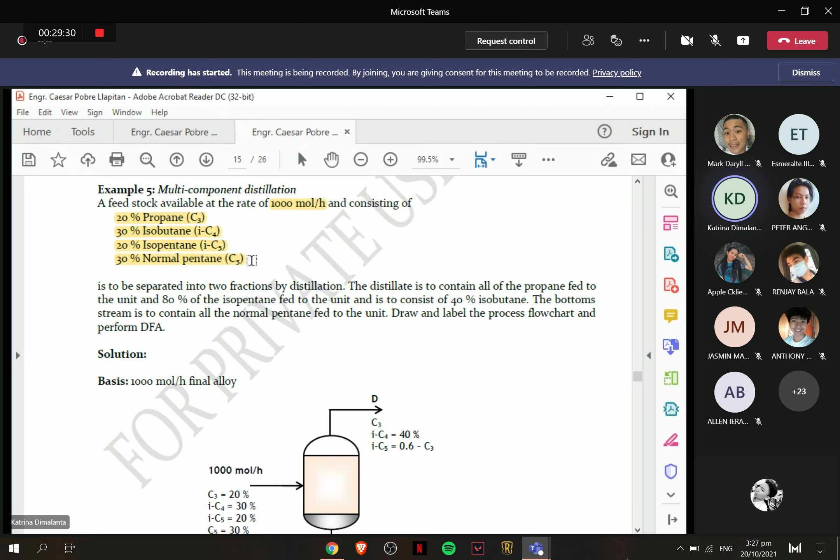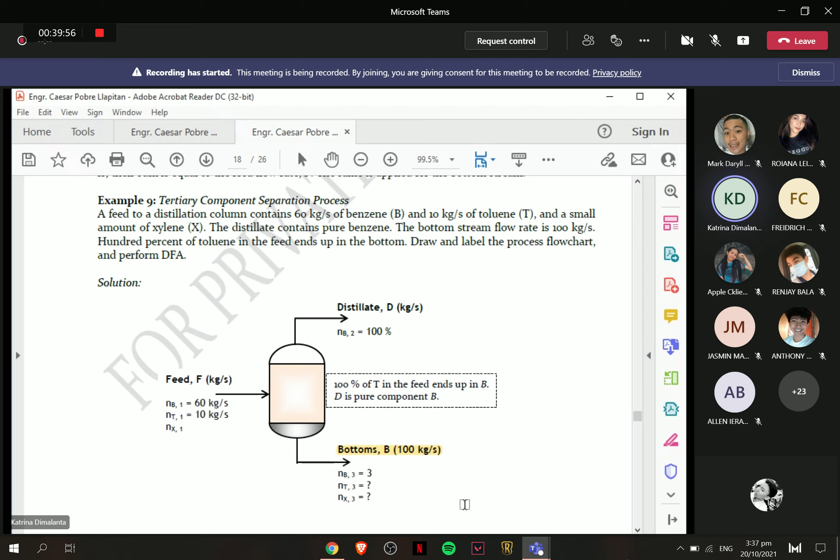Yung bottom stream mo is meron kang given na flow rate, pero hindi given sa'yo yung mga ito. So sabi, draw and label the process flow chart and then you're gonna perform the DFA. So, number of unknowns. So ito ang ginamit natin dito is yung alternative formula kanina. Yung sinabi na yung NDF or number of degrees of freedom is equal to the number of unknowns minus the number of your independent equations. So kung nalilito kayo dun sa unang formula ng degrees of freedom, I suggest na gawin ninyo yung pangalawa kasi personally, I use that more. It's easier to remember din kasi.

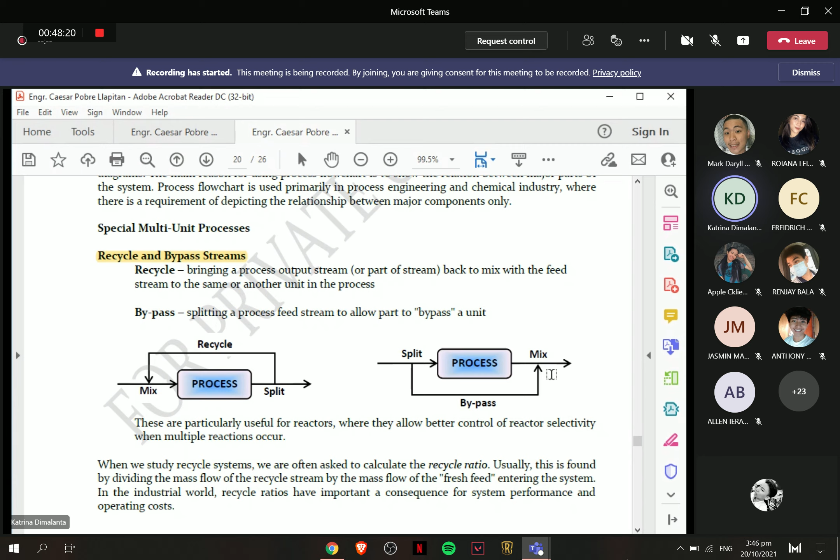So depende nga yan sa pangangailangan mo. Hindi lahat ng processes kailangan mo ng recycle. Again, hindi lahat ng processes kailangan mo ng bypass. Pero it's important na alam natin na meron tayong options na ganito for our process reactions. Okay?

Meron tayong tinatawag na reactor separator structure. So meron kang reactor, tapos yung iyong product after the reactor ay isa-separate mo. Ang sineseparate mo, yung mga nasa taas, yung babalik dito sa fresh feed mo, yung nire-recycle mo, yun ay unreacted na reactants. Tapos itong product mo, kumbaga, mas concentrated lang siya na product from your reactor. So nagigets pa naman yun, no? Para lang hindi masayang yung reactant mo. Kasi, again, we will always try to find ways na maging optimal yung ating process kung saan, kumbaga, nabibigay natin yung best quality of the product at the lowest cost. So yun yung gagawin natin.

Ang note lang dito, itong separator, pwede daw yan na isang process lang, pwede naman na yung separator mo actually is divided into several processes. What if yung separator mo pala is distillation column plus may crystallizer ka pa, something like that. So that's possible. At yung sa bypass naman, gaya nung sinabi ko kanina, it's used to obtain a precise control of the output stream. So if you want to vary your output concentration, pwede na maglagay ka ng bypass stream dyan. Okay?

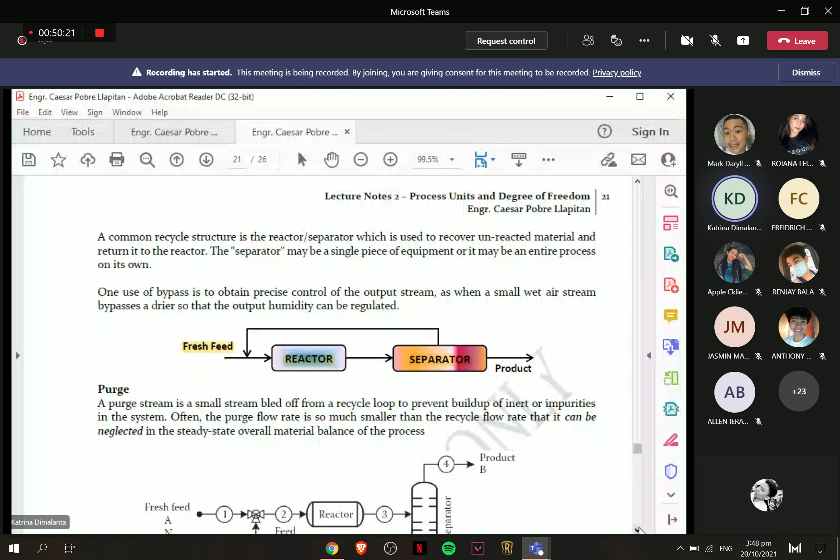So kapag sa vapor naman, pwede mo makontrol yung humidity, so in a way, concentration pa din yan ng inyong product stream. Tapos ito naman, meron tayong tinatawag na purge. Kasi ito recycle stream ito, so this is pretty similar dun sa example na binigay sa inyo last time, pero wala nga lang purge yun. Itong purge, ang ginagawa, take note, yung direction ng arrow nyo is palabas. Ang ginagawa mo dyan, binabawasan mo lang yung recycle stream mo. Kasi ang nangyayari kung minsan, yung fresh feed mo, pwede na meron kang inert substances dyan, kunwari, mga hindi talaga nagre-react na part dun sa reaction. For example, pag sa combustion, remember sa chemistry, yung nitrogen ninyo, hindi yan nagpa-participate sa combustion.

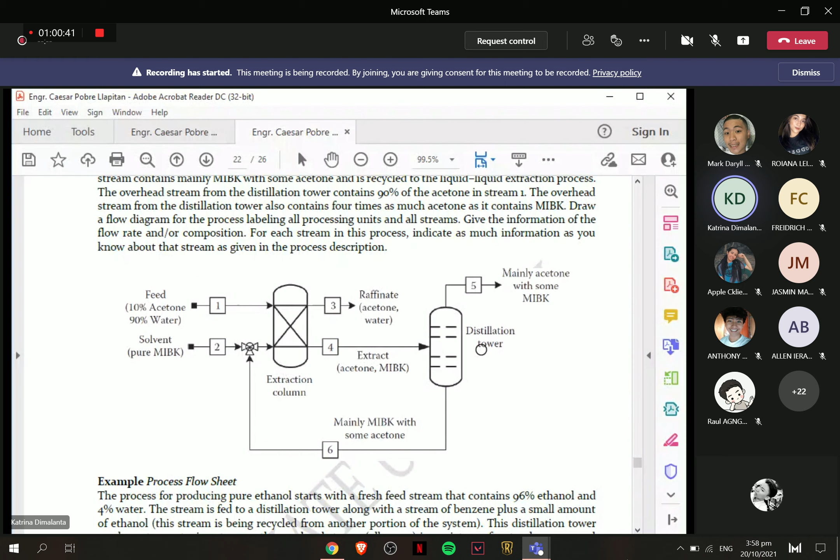So it says, draw the process flow sheet again. Then, this one is quite long. My gosh. You have a process for producing pure ethanol. So the first one there, you have a fresh feed stream. Then, it is 96% ethanol. So basically, what we want, our product, is pure ethanol, okay? And if that's 96% ethanol, the rest is water.

It's being fed to a distillation tower. Then, in your distillation tower, there's also a stream of benzene plus a small amount of ethanol. This stream is a recycle from another portion of the system. Your distillation tower has two outgoing streams. The overhead is purely vapor and made up of water, benzene, and ethanol.

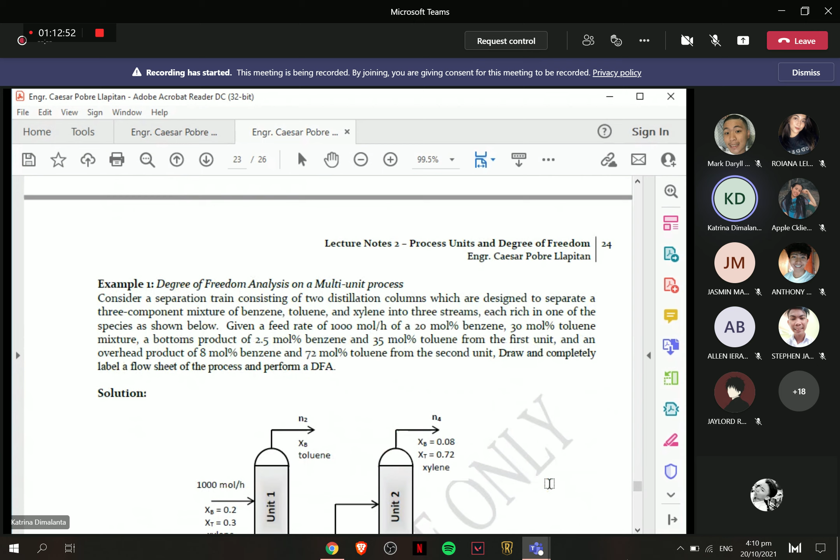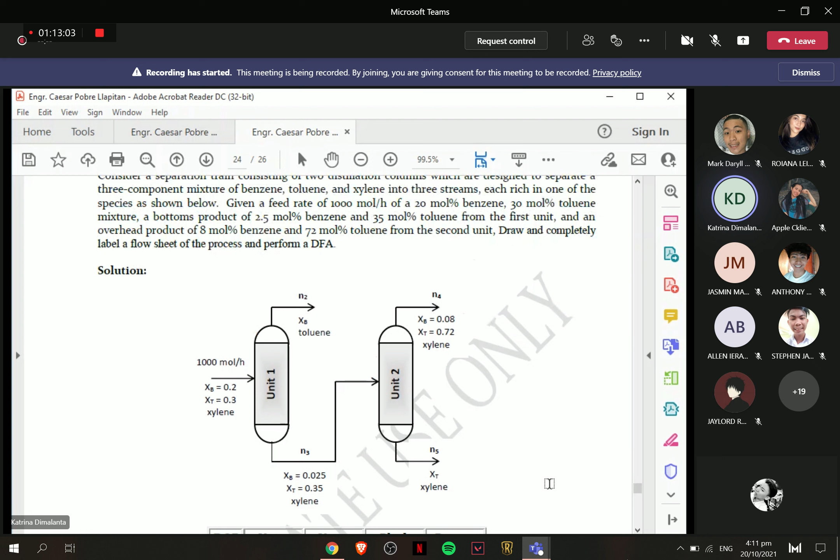So, ang sabi dyan, consider a separation train consisting of 2 distillation columns which are designed to separate a 3-component mixture of benzene, toluene, and xylene into 3 streams, each rich in one of the species as shown below.

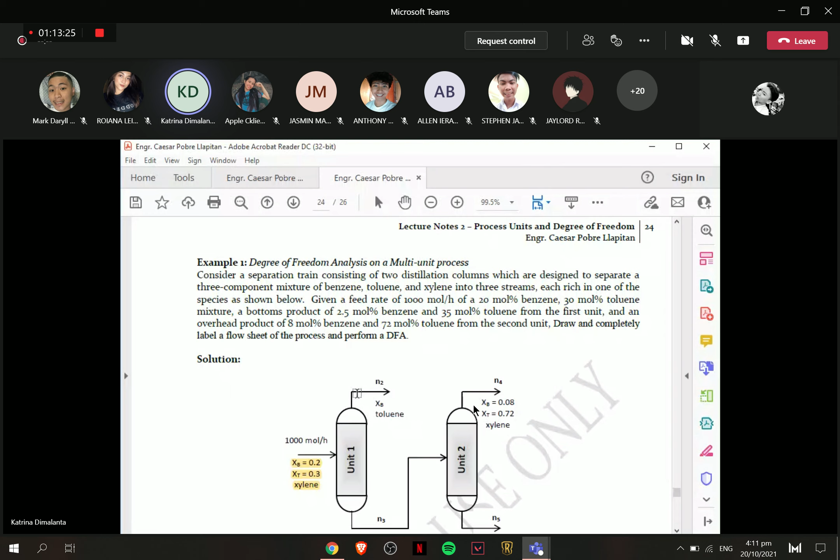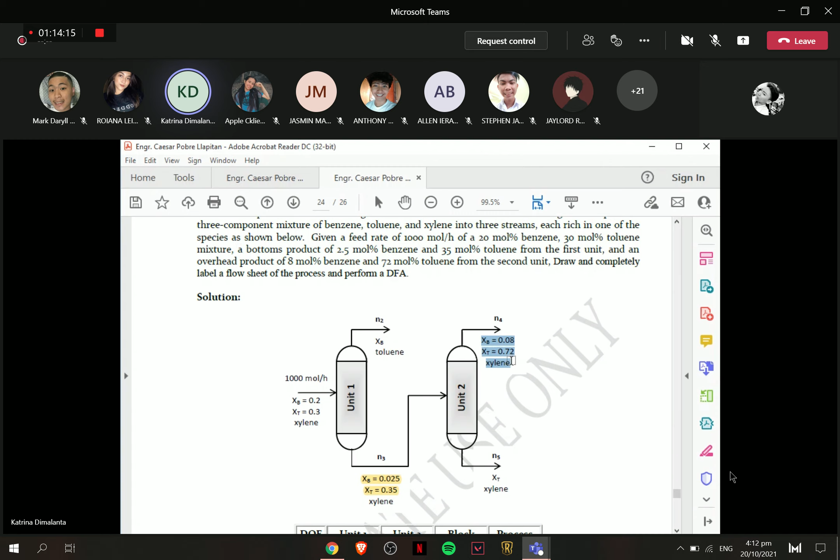So, given a feed rate of 1,000 moles per hour of a 20 mole percent benzene, 30 mole percent toluene mixture, and a bottoms product of 2.5 mole percent benzene and 35 mole percent toluene from the first unit, and then an overhead product of 8 mole percent benzene and 72 mole percent toluene from the second unit. So ito yung given niya. Draw and completely label a flow sheet of the process and perform a DFA.

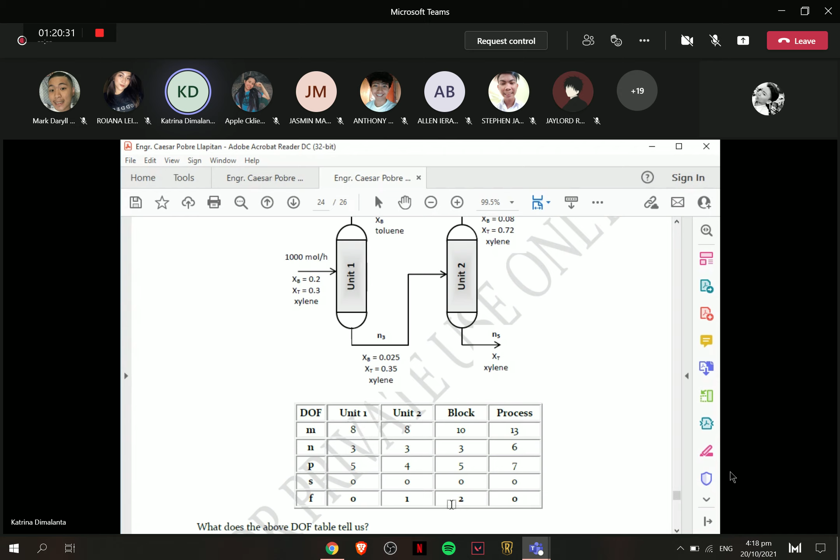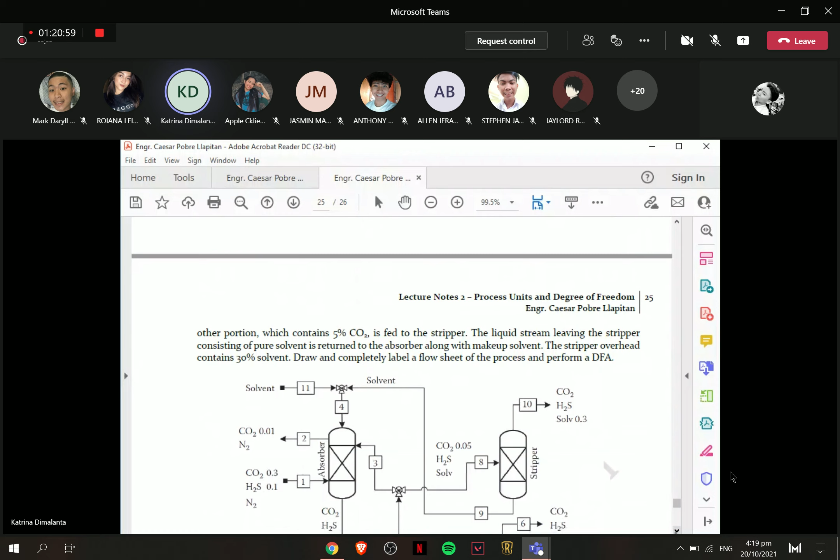I think na it will help you in determining kung paano yung steps kung paano nyo isosolve yung inyong given problem. Okay? So, I think itong example na to, this is an exercise. So, I don't think we have time for this right now.

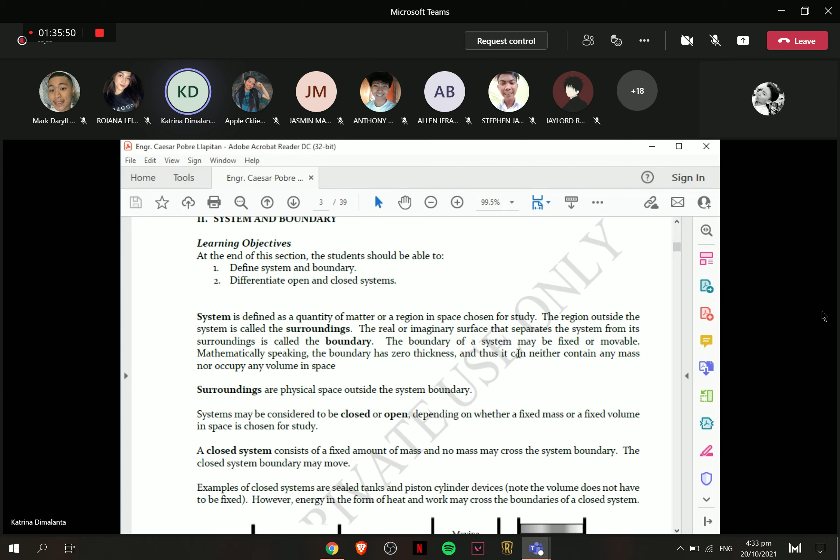Pag sabi dyan, systems may be considered closed or open. So ito ay depende lang if it's a fixed mass or if it's a fixed volume system. So ang difference lang yan. So sabi dyan, pag closed system, it consists of a fixed amount of mass and no mass may cross the system boundaries. So usually, this is what happens when you do a batch process. Hindi naman all the time, but most of the time, this is what happens.

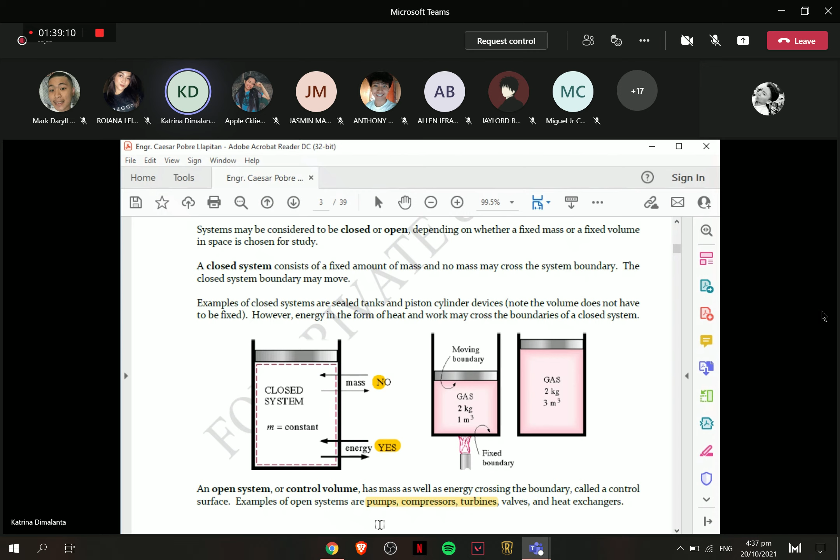So, kumbaga, ang ginagawa mo, change mo yung density nung gas mo, etc. So for heat exchangers naman, ganun din. Heat exchangers is ginagamit natin when you're heating or when you're cooling a fluid. Kasi yun nga, you exchange heat within the system. So, meron kang fixed amount na kayang ilaman ni heat exchanger. Pero all the time, merong labas-pasok na fluids dyan or steam, and merong exchange of heat. So, may pumapasok at may lumalabas na energy dun sa boundary mo. So, yun lang yung difference nun, okay?

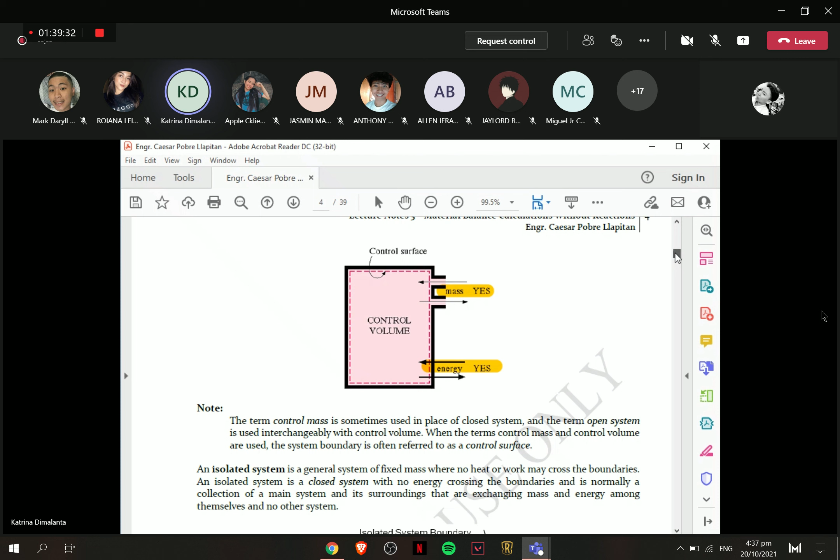So, compare nyo to dun sa drawing nung sa closed system kanina. Dito, yung mass niya, pwede nang permitted na pumasok at lumabas. Ang isolated system naman, it's generally just a system na hindi pwedeng pumasok both yung energy and mass. Ang sabi natin, yung closed system, hindi pwedeng labas-pasok yung mass, pero pwedeng mag-cross yung energy. Kapag dun naman sa open system, pwedeng mag-cross ng boundary both mass and energy. So isolated system naman, walang pwedeng mag-cross. Kapag kunwari, parang nakaseal siya, tapos hindi ka pa pwedeng magkaroon ng exchange in energy. Yun lang talaga yung nangyayari sa isolated na system boundary. So actually, yun na yun. Dinefine lang natin yung terms na yun.

So for next meeting, we can proceed to the concept of material balance talaga. Tapos pwede na tayo mag-start mag-solve ng mga problems na material balance talaga, yung kailangan nating i-analyze. So that's it for class ngayon. Meron ba kayong questions?

Madali lang naman yung second part, that's mostly definitions. Pero dun sa mga first few parts, yung DFA, medyo okay pa ba kayo after that?